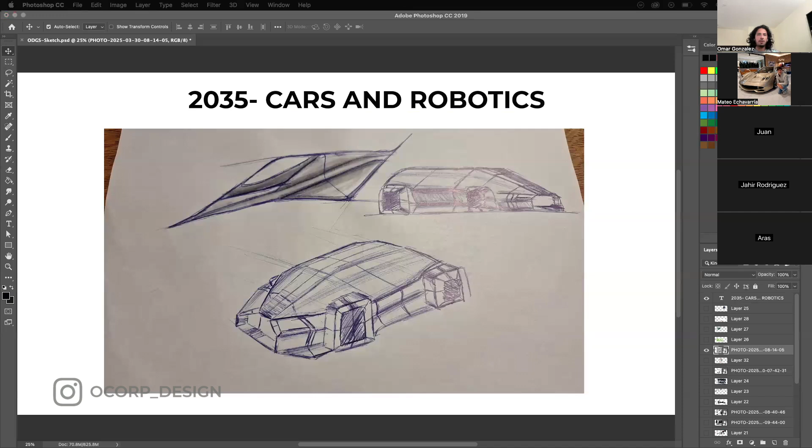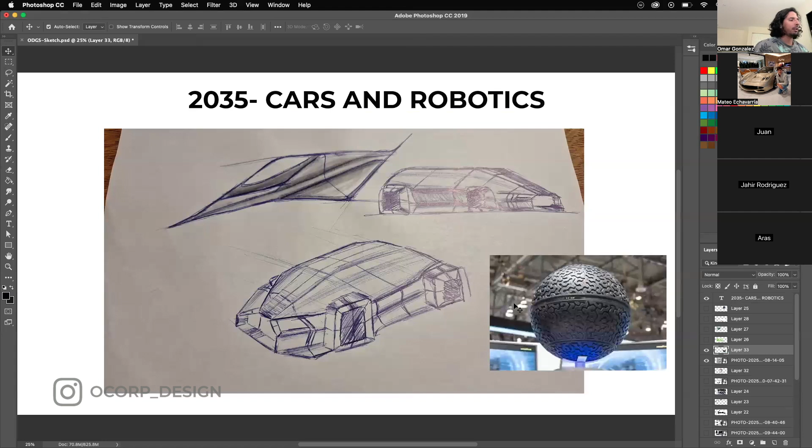So I thought of that, and I thought of electromagnetic. So that thing that you show. I don't know how to say it in English. Electromagnetic superconductor, or maglev, magnetic levitation. Goodyear does wheels like that. Concept. They have concepts, right?

Yeah. So I think it will be better if I cover that wheel with a rectangular shape. I've seen too that there are a lot of concepts with a really sharp design. So that's why it's not smooth, but it's sharp with a lot of details, like the cabin. That cabin will be all glass, so the passenger can see and watch the environment. Yeah. Okay.

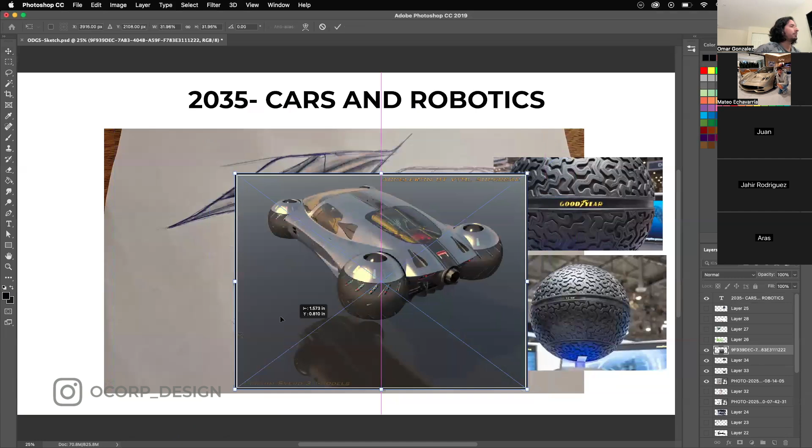How can I say? My inspiration was a fighter jet. Yeah, jet fighter. And the Lamborghini that's inspired by a jet. I don't know if you understand me. I'm not sure which one that is, but I think it's one in the war. Yeah. All right. This is the image. Here. Okay.

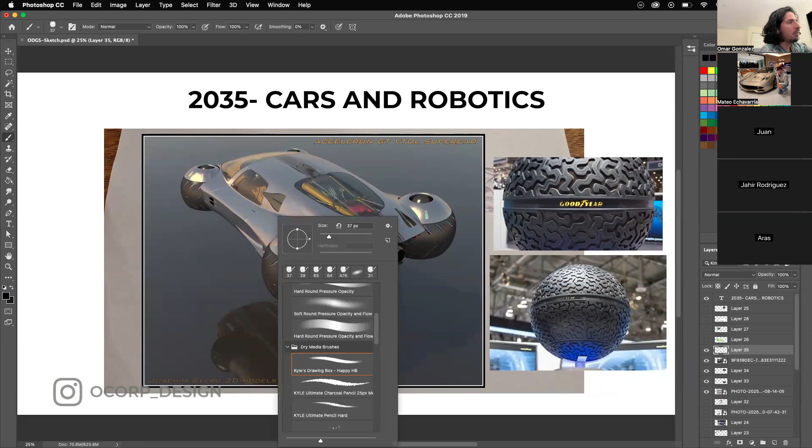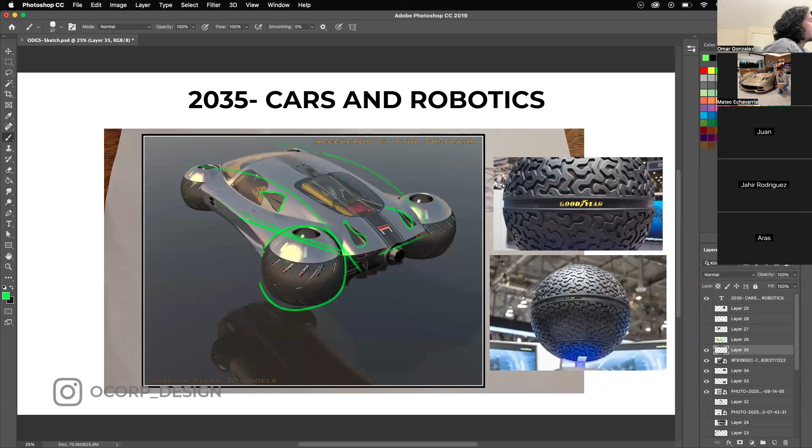This is the image that you sent, and this is roughly the idea that you have, right? Having some spherical wheels, but maybe a more simplified shape. Exactly. I think that's a good idea, because if you think about it, this is just a normal car with spherical wheels. But the way you're doing it, Mateo, I think it's gonna look even better, because you're having the spherical wheels but a more futuristic shape that is more simple. It's not gonna be as complicated, and it doesn't have to have these NACA ducts and aerodynamic features. So you can have something more pure, and it looks new.

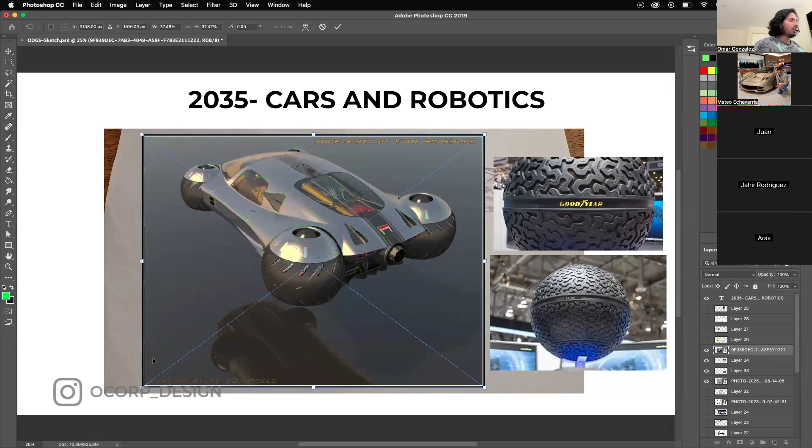I think aerodynamics will be different if the cars are levitating, because the aerodynamic charge will be different in the air than on the ground. I don't know too much about physics, but it's a hypothesis. No, I think you're right. That was my idea, and obviously, I think that car will be driverless. So the passenger will only be watching the environment and having fun in the car.

And that shape in the front of the car, like a vertical V, it's the lighting, the headlight. Over here. Yeah. There you go. And the rectangle that is to the left of that thing. I don't know how to explain. Okay. So that's the concept. It was really fast.

I mean, an hour and a half, it's a good time. You have good material, so I believe you can come up with something really good. And when it comes to the aerodynamics, I think there's an opportunity to do something really unique, because usually on cars, since they are attached to the ground, there's always an aerodynamic issue, because they have to be on the floor.

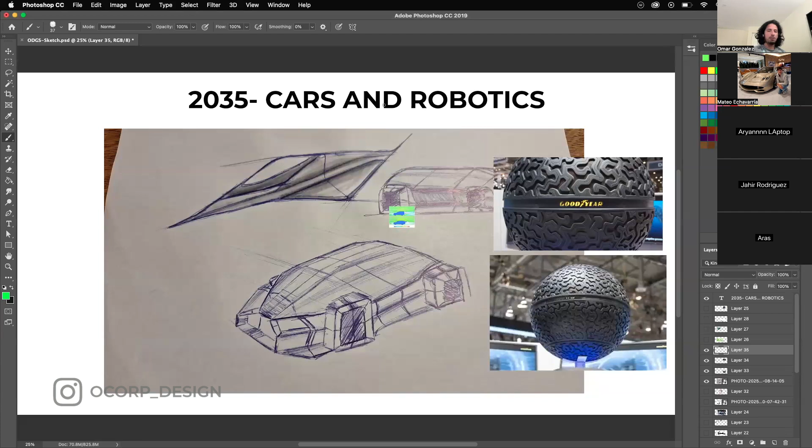But if the cars are levitating, it's like an airplane, right? So aero is going to be better. Why? Because you can have the whole fuselage. Air can come from any direction and it's going to have less drag in certain areas. So, for example, let me just bring you something here. Let's go simple. All right. We have aerodynamics, right?

Here, the perfect aerodynamic shape is the teardrop shape, right? So this is not the perfect aerodynamic shape. No. This shape is because we have to do it because of the package, the windshield, we have an engine, we have to reduce weight, we need to have a certain segment of car to fulfill the needs of the user, we have many seats, right?

And we are attached to the ground, right? That is fixed now. But as you said, in the future, maybe cars are going to be levitating, so we're going to run air through the bottom of the car. And the shape is going to be more gentle with the air, I would say. Because at the end of the day, that's what you're trying to do. We're creating shapes that are nice to the air, right?

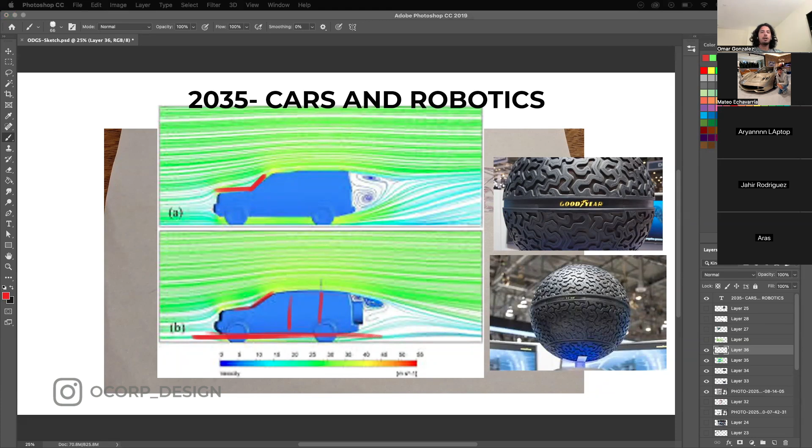So here's another example. For example, this looks like a nice aerodynamic shape, because it's closer to the ideal aerodynamic shape. However, we have wheels, and the wheels are going to produce a lot of drag. And that's why we got fenders, right?

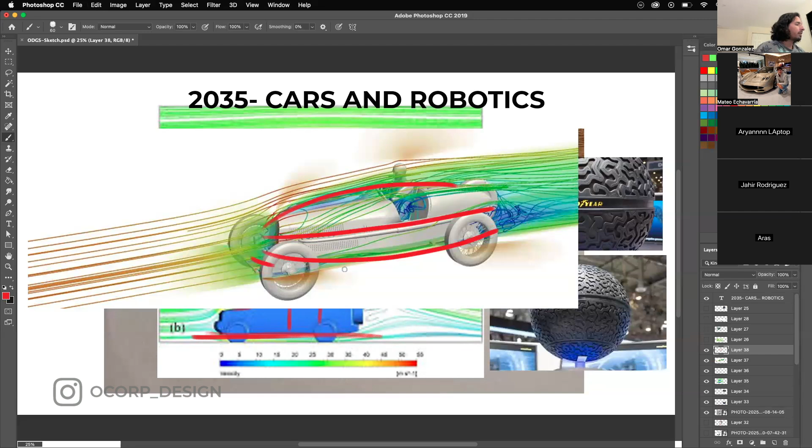And technically, the best aerodynamic shape for a car should be a car that has the wheels covered. Technically, that's what works, but people don't like it. That's the issue, right? So basically, this one is very good aerodynamics because it's closer. McLaren Speedtail. You see that the wheel is covered. Yeah, and they maximize the interior shape.

Exactly. Mateo, now it makes sense why you're doing this. I mean, you're right in many aspects. If the car is going to be floating, things are going to change. The air is not going to change, the physics is not going to change, but the way we interact with physics is going to change. So, let me just find the perfect aerodynamic shape.

So technically, if we go down the rabbit hole of aerodynamics, this is the one. It's a little bit pixelated, let me see if I can find something else. But that's basically the one: the streamlined teardrop shape. This is the shape of a teardrop. Streamline means that it's stretched. And this is just nature. Physics interacts with this surface naturally. This is the best.

This is the optimal for aerodynamics. That's why boxy cars like Jeeps are not that good on the street. They roll over; they're not the best for aerodynamics. That's why fast cars are low, with a low center of gravity, and streamlined. That's why cars look almost like sculptures, but it's not aesthetics. It's nature. We need streamlined shapes to optimize the aerodynamic coefficient and the drag. The resistance is less.

And you have examples like this one. Resistance is 100%. Why? Because it's literally a flat piece of metal or plastic, and the air is going to aggressively hit that wall. A sphere is a little bit better because you have round shapes. The teardrop shape is way better than the other two, but the streamlined shape is the best. It's just like 5% resistance. So the ideal aerodynamic vehicle should look like that.

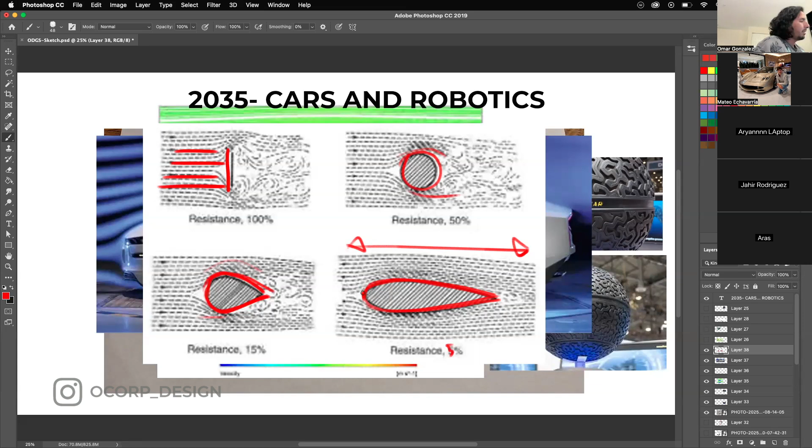But to make it work, on an airplane for example, you need to put wings, landing gear, windows, many things. That's why airplanes kind of look like that, but not quite yet. And if you look at airplane wings, this teardrop aerodynamic profile is the profile airplanes use for the wings. I think the name of that is attack angle or something like that. Probably, not entirely sure. But this is literally the airplane wing, and it has that aerodynamic profile.

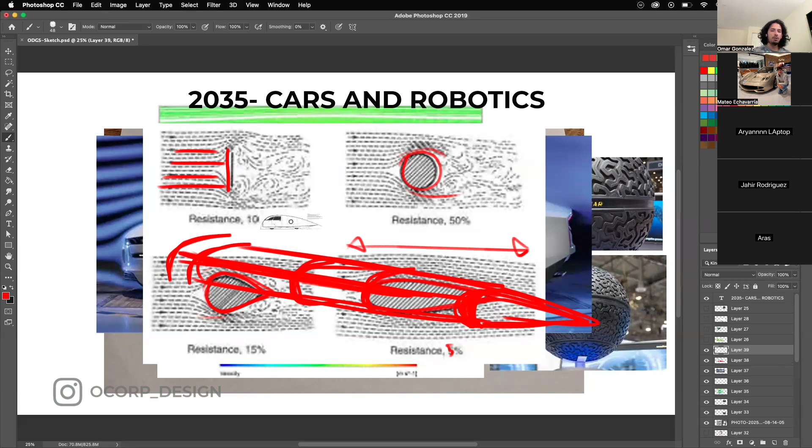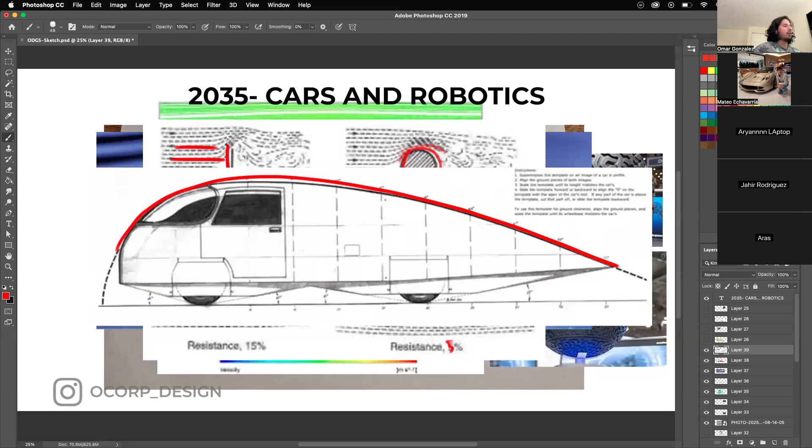And many people throughout history have tried to do aerodynamic shapes. There's another one. This is technically the best aerodynamic car shape, because it has that streamlined shape. But since we're stuck to the ground, it gets complicated, because we have to deal with the air under the car. But Mateo, if you're going to have a car that floats, you have a good opportunity to make something more streamlined.

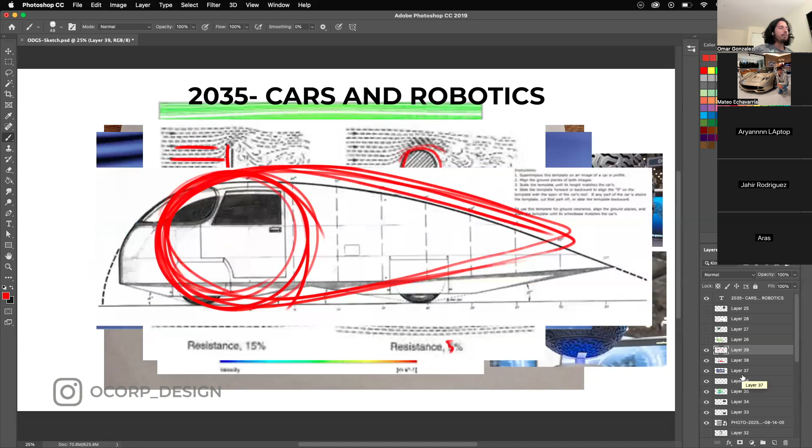Yeah, I got an idea. So you can think about it and come up with a concept based on the idea you were working on, or start a completely new one. If your topic is going to be aerodynamics and levitation and/or spherical wheels, these are the topics you need to grab: spherical wheels and the most optimal aerodynamic shape. Perfect. And you combine it with your super simple language. Why? Because this is beyond aesthetics. This is what needs to be done.